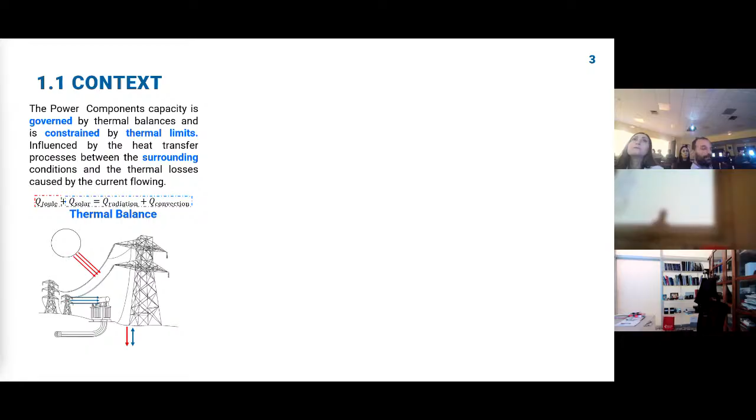Thermal limits. The thermal balance is being influenced by two main factors. The first factor is the heat that is coming from the current flowing inside the component. And the second factor describes how the surrounding medium has the ability to decrease that heat.

In particular, the maximum capacity, the maximum current that could flow inside the component, is proportional to the delta between the temperature of the ambient and the maximum temperature of the component. So if the ambient temperature starts to increase, the capacity will decrease.

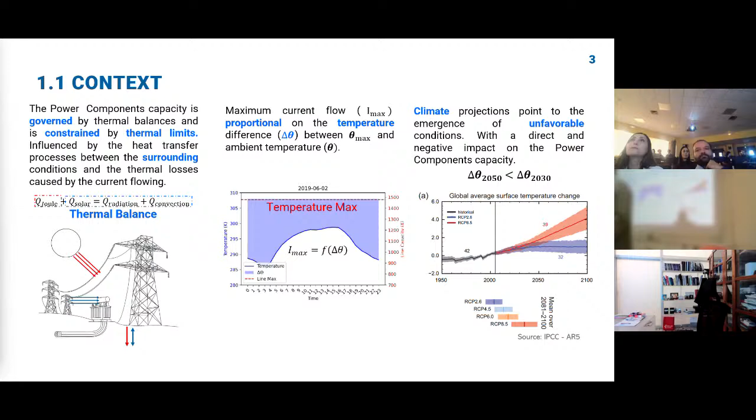However, climate projections point out that the temperature of the ambient will probably increase in the next decade, meaning that this delta for 2050 will be smaller than for 2030. But we don't know how much it's going to be. So that raises my first question: how can we project reliable thermal limits for the next decades?

Before we start to explain the method, let me explain three fundamental concepts in this investigation. The first is the ampacity. The ampacity is the real maximum current that a component can carry out safely. It could be calculated or monitored, and here you will see it in blue.

The second is the rating. The main difference between rating and ampacity is that the rating is a value selected by the operator. So if I have a really conservative rating, we could be under efficiency. However, if I select a more dynamic rating, I could be in a risky zone.

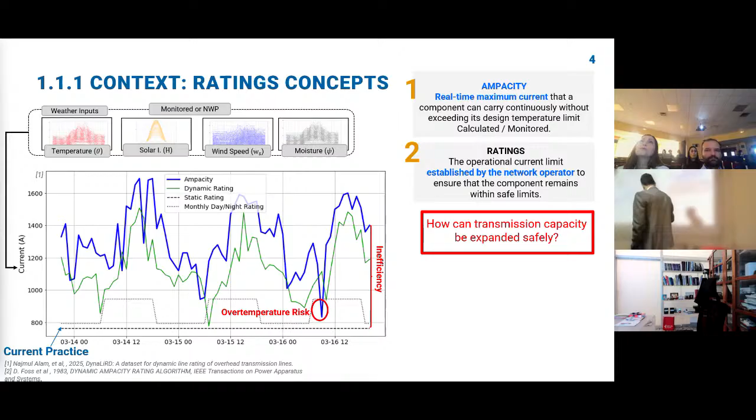So how can the transmission capacity be expanded safely? In order to address this, over 3 decades ago, the concept of dynamic ratings emerged. This concept is mainly related to weather-dependent capacity, using a component at a higher maximum capacity allowed by the operator.

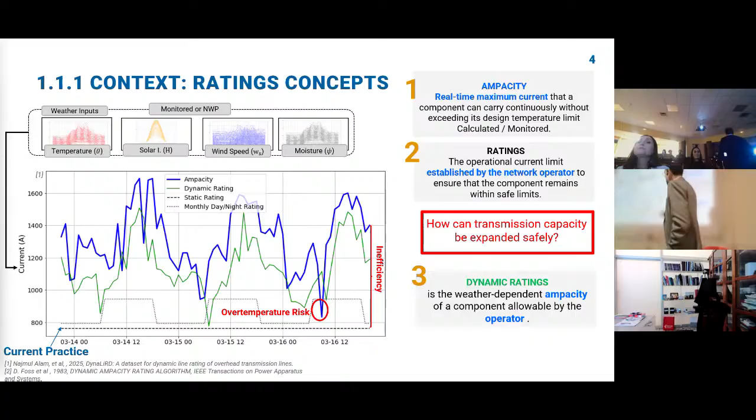So the second one. However, this concept is mainly related to short term. So that raises a challenge: how to develop thermal ratings in advance without compromising safety?

So now we've established the fundamental concepts. Now let me show you the full landscape of the context. This diagram is mainly divided into the three main components that this research investigates, the main subjects of the research. Let me explain a little bit.

Here in the first column, we see that thermal models are really well established and standardized. Second, we see that most of the work has been done for overhead lines. And third, that this work has been done for short-term operational planning. So let me show clear methodological gaps.

First, there are no studies that integrate dynamic thermal rating with long-term planning. Second, there is no standardized method to include dynamic weather ratings with risk-aware planning. And third, and most importantly, climate change is not directly included inside the rating.

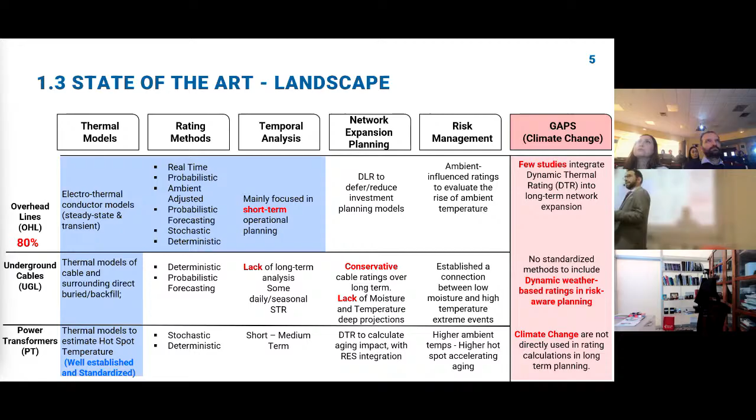So now that you can see the full landscape of my research, let me show you the key studies. It's important to highlight studies that analyze the interconnection between climate change and capacity. The first one is Bartos, who analyzed overhead lines in the United States using representative concentration pathways. He found that the mean capacity in the United States would be reduced by 6% by 2050.

The second study is in the UK. Cradden analyzed overhead lines using 100 weather generator scenarios for 2050. She found that, for example, for the summer months in 2050, capacity will decrease.

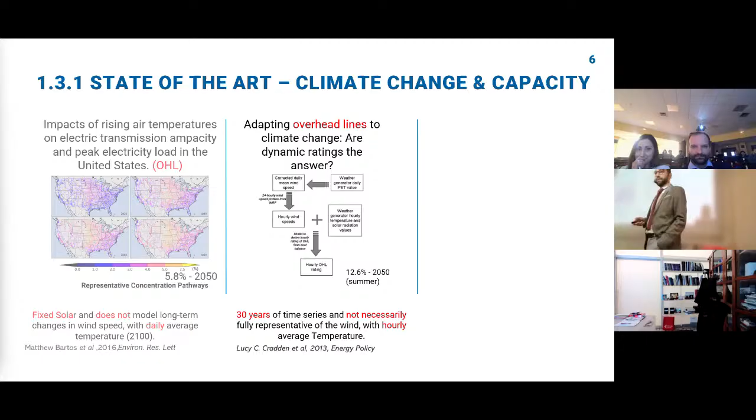However, as you can see, all of these studies have focused on overhead lines, and probably other components are not fully represented. So the question is: can we fully represent future climate in order to analyze the capacity and power system of all the components?

The second study is related to DTR with probabilistics. The first study here is on overhead lines, made by Douglass. The important part of this study is that he introduced a new concept of DTR, called quasi-dynamic rating. To do that, he introduced cumulative distribution functions inside the ratings in order to let the operator introduce risk.

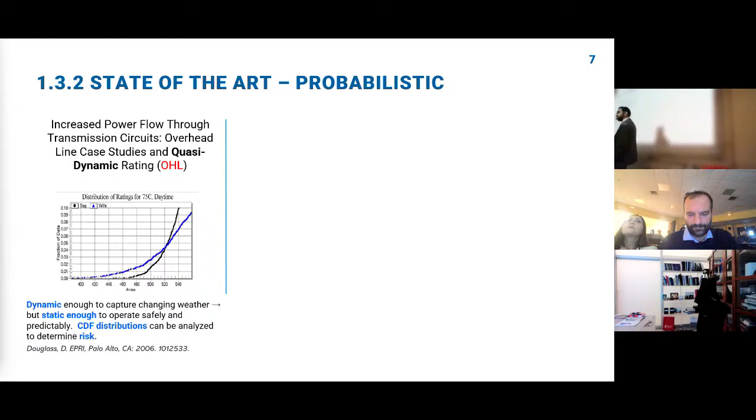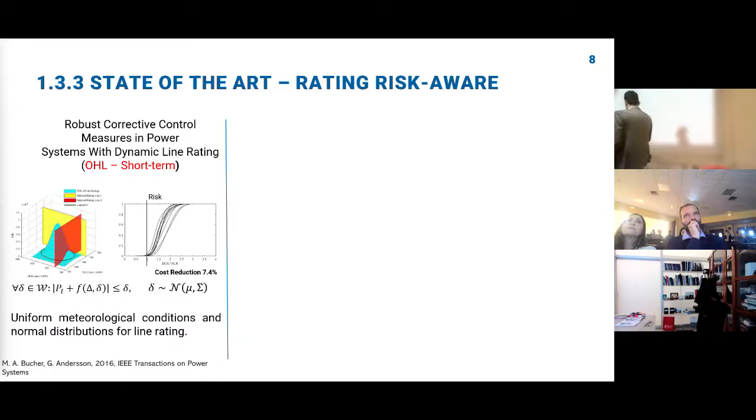Now, beyond analyzing capacity, we need to see how the rating is increased with the risk. The first is Bucher, who introduced a robust control inside the rating using a probabilistic constraint. He found that doing this, the cost could be reduced 7.4%.

However, all of these investigations have been focused on overhead lines and in the short term. So these insights shape my contribution.

This shapes my contribution objective. The main objective of my thesis is to develop a methodology for long-term power system planning that incorporates the interrelationship of three main concepts: thermal ratings, network planning, and climate change. It will be addressed by six questions.

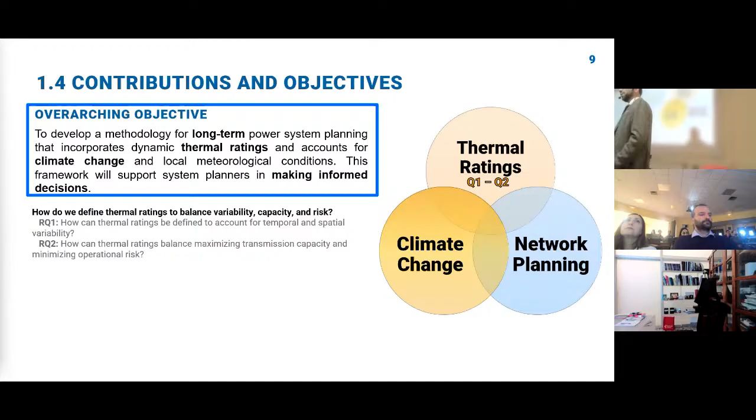The first question is how to calculate the thermal rating in advance, including variability and capacity. The next two questions are related to how to introduce these ratings inside the network planning. And the third is how climate change will impact this using the previous questions.

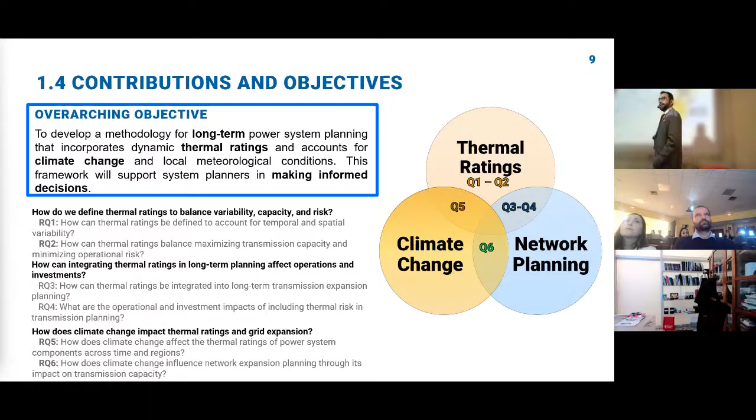So until here, we have established the context and the main question of my research. The following slides will focus on answering only one question: how we could calculate in advance the rating for the next decade.

It's important to highlight that in order to calculate the ratings, first we need to calculate the capacity. And in order to calculate the capacity, we need to use thermal models. Here is the most used and most studied one.

It's the thermal model for overhead lines, mainly governed by the thermal balance and influenced by the temperature of the ambient, solar radiation, and wind speed. However, as we know, overhead lines could extend for many kilometers, so this methodology analyzes the spatial variability of each segment inside the line in order to find the worst condition.

The next thermal model I'm showing you here is for underground cables. The main difference between underground cables and overhead lines is that now the heat exchange occurs with the soil. Second, this component is mainly installed over 80 centimeters and even up to 5 meters deep. Third, the thermal balance formulation is mainly influenced by soil temperature and soil moisture.

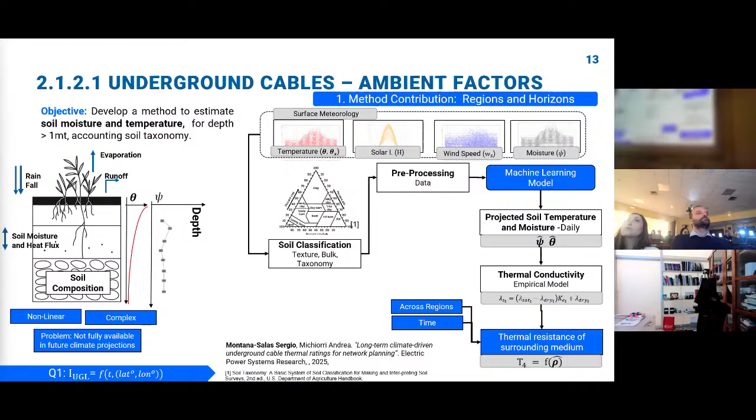Now we have our last thermal model: the power transformer. This thermal model is really influenced by solar radiation and ambient temperature, and the key factor here is the wind factor. So here we use a well-known standard to calculate capacity, but it's mainly modified in order to introduce the influence of solar radiation.

It's a five-step process. First, for the specific location of the component, I gather the climatological variables. Second, by the use of the specific thermal model over time, I'm going to calculate the capacity. So here, in this specific figure, you see the calculation of the capacity over 50 years. After we have all the simulation, we have the possibility to divide it into specific temporal subsets. For example, monthly hour, month, or year.

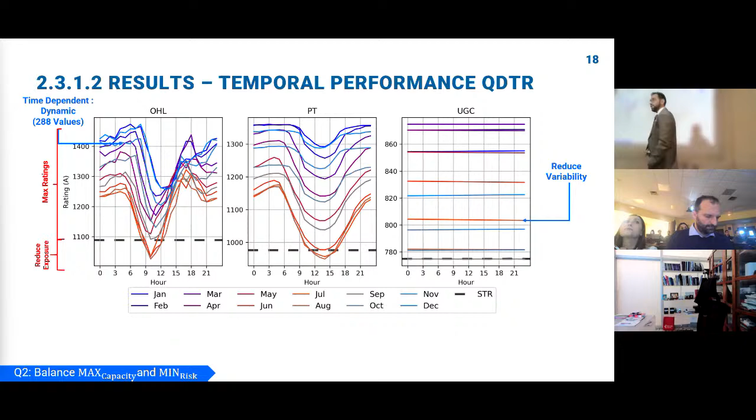The next is the temporal performance of the QDTR. So let me explain this slide. We could see 3 things. First, it is time dependent, meaning we have the possibility to select monthly hour, as I showed you before. The second is the seasonality: colder months, maximization of the rating; other months, reduced exposure to climate change. And the third thing that we show here is the difference between models. Underground cables, as you see here, have reduced variability, mainly due to the influence of the soil inertia.

The third result is a spatial performance of the QDTR. Sorry, I was moving. So to do that, we ran the same previous methodology, but this time across Europe, with the 0.25 resolution and over the last 50 years. With that, we could see some interesting things.

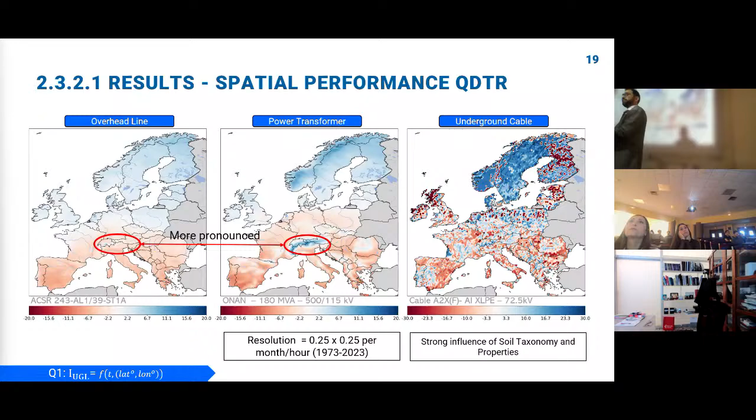So until here, we have the summary of the first chapter. So what was my motivation? I need to calculate the rating in advance. How did I do it? Two contributions. First, in order to gather the information for underground cables, a new model to estimate projections of soil moisture and soil temperature, in order to calculate the thermal resistance.

And the second and most important one is the quasi-dynamic thermal rating. This is not only a methodology, this is a rating description that should be integrated inside the dynamic thermal rating. With this, we could maximize the capacity, for example, 22% in power transformers in a regional way. And second, meanwhile, controlling the risk, because all the previous results that you saw are with a 1 per 1,000 lower threshold risk.

So until now, I established the methodology to calculate the rating number. In the next slides, I will focus on how to integrate this thermal rating inside the network plan. So here is a typical network expansion plan formulation as an optimization problem. This optimization aims to minimize the system cost. However, it's mainly focused on controlling the capex of lines and power transformers, and not generators. We did it because I want to isolate the influence of the QDTR.

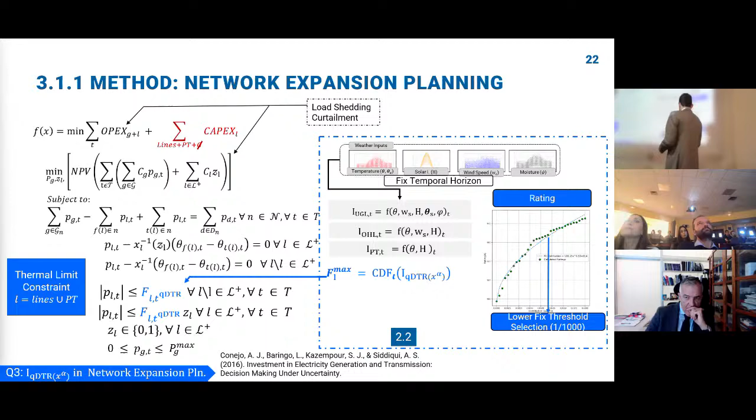So a little bit of how it works for each network component, for example, underground cables and overhead lines. I'm going to calculate the QDTR, that's a cumulative distribution, and fix a specific lower threshold. As I said, normally all my studies use 1 per 1,000. And with that, we replace the maximal limit constraint inside the thermal limit constraint of the optimization.

So let's see the results. First is the impact of the QDTR using a specific network expansion plan, now with the library PyPSA. We managed to simulate the QDTR over all the regions that you can see here. The way PyPSA works only lets us use QDTR across interconnections, so a reduced quantity of lines. Even with QDTR only on interconnections, we see that the system cost is reduced using QDTR with a finer resolution.

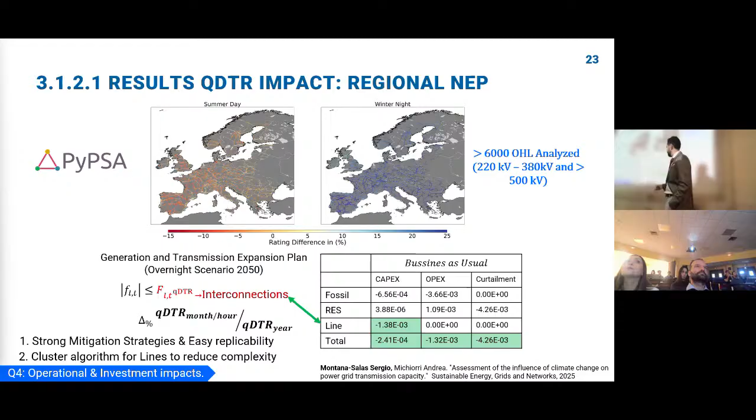The second: in order to overcome the limitation of PyPSA, I decided to move to a specific network test case. As you can see, the 24 nodes are now projected in the south of France, including the QDTR for lines, underground cables and overhead lines, and we analyzed two typical cases.

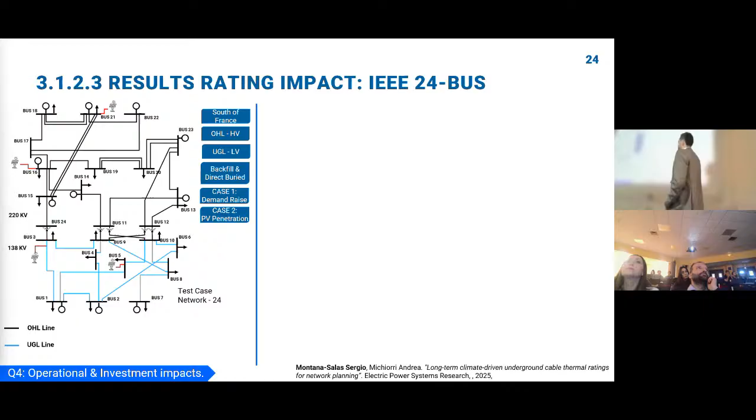So this result is very important. First, because of capex reduction: with the use of QDTR with a finer resolution, we don't need to build more lines. However, the second result, now with PV penetration, is that the QDTR highlights the dangerous zones where we have the probability of high flow caused by the PV and reduced rating caused by seasonality. And in the end, that means we need to build new lines for these two consequences.

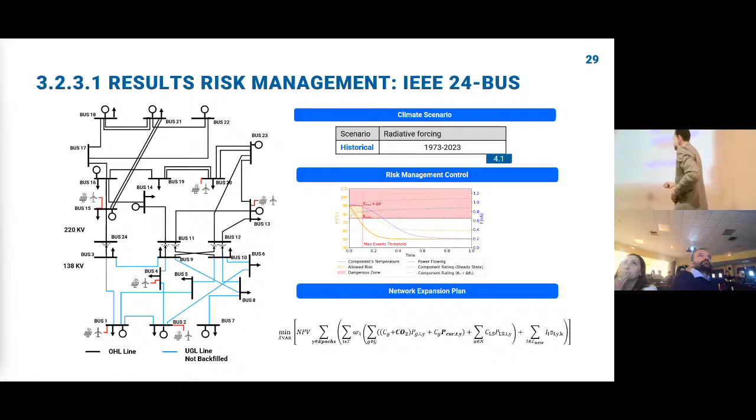So for this, we use our test case, a similar test case, but this time with our risk management control, and the optimization will be expanded a little bit to include a multi-period optimization. So we have the results, but before, I need to explain this chart a little bit. Left columns are QDTR calculated yearly. Right column, QDTR calculated monthly hour. Yellow results mean the results of the use of a static thermal rating, the conservative one that says we need to use 40 degrees, for example, as the temperature.

And the second is the power flow result for the QDTR yearly using the methodology that I showed you before. So three behaviors to show here. First behavior, in the specific lines, by the use of the QDTR yearly, we show the same contribution that I showed you before, a complete reduction of the investment. It's not necessary to invest in a new line in this specific line. And the second behavior is more complex.

It's showing that using the static thermal rating in another line, because it's the 18 and 22, we need a new investment. But here, the rating starts with a specific calculation, but before the investment, it's going to be constrained enough to be held until 2040, and in 2040 we need a new investment. So here, we delay the investment using the QDTR with risk control.

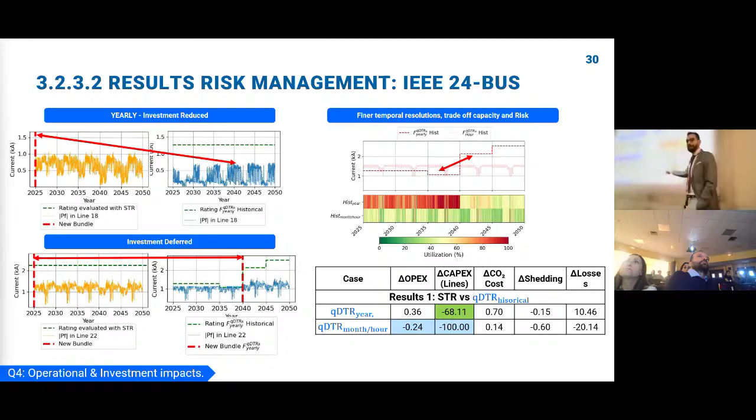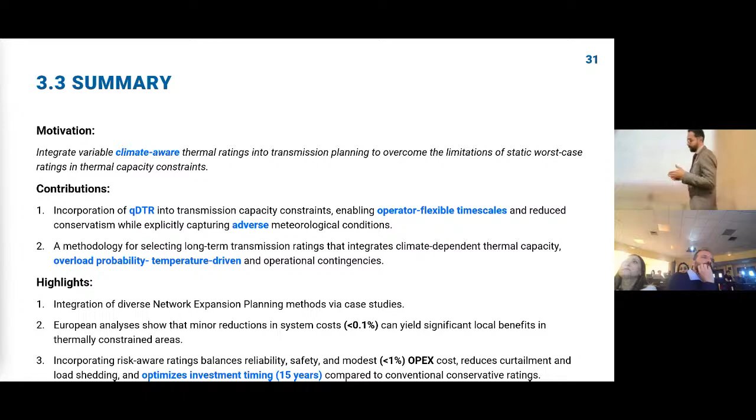So as a summary, question, how to integrate the QDTR inside the network planning? To answer, the first method is going to be introducing the QDTR to replace the rating directly inside the network expansion plan. And the second, a temperature-based, more constrained method in order to calculate the rating. To highlight, we use this case in different network expansion planning, and we found similar results, showing the performance of the QDTR. And the last, if we use the risk control, we could delay investment and also reduce it if we change only the resolution inside the QDTR.

So until now, we have established how the thermal rating methodology is going to be, and how to introduce it. And now we need to answer a question: how to include climate change and what the impacts are going to be. So it's important to highlight that all the calculations and every result that I showed before is with historical values. However, if I want to analyze a network today or plan a network today, it must work in the next decades. And we know that in the next decade, the temperature is going to rise. So how did we find a solution to that?

So my new framework here introduces all the methods that you saw before, risk control, QDTR. However, we change the data. Now the data is future data about climatic conditions. For this, we are using specific data, the climate and energy indicator for climate projections, as a proxy or best information available for long-term climate conditions. So let me explain a little bit more about this data.

So this data is made according to the representative concentration pathway, corresponding to the radiative forcing that is related with the CO2 emission and the greenhouse gas emission too. Also, it is important to highlight that this data set has a link with electrification. So let me explain more about this. We are going to take as example the business as usual or the worst case representative concentration pathway, that is 8.5. In the 8.5, we are going to have high temperatures. If we have high temperatures, the power system components are going to be more stressed.

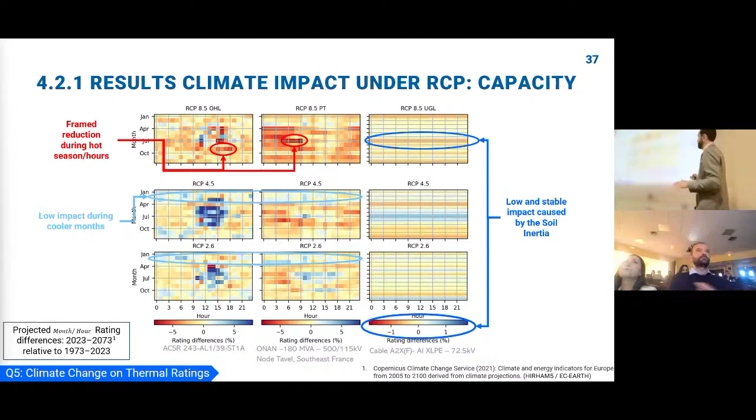So the following results, we use the same methodology that you saw before, but now we do it in a continental case. We use the RCPs in order to calculate how the QDTR is going to be in 3 main components. So the same structure. What we saw before was a specific power system. This is a regional pattern. As a regional pattern, we see that the least impacted still is the underground cable, confirming the hypothesis. Second, that the power transformers are the most stressed by the climate, even up to 5.5.

However, as I say, we can see that some regions, for example, the south of France and the south of Spain, will be more impacted than other regions. And mainly because, as I said before, it is influenced mainly by the ambient temperature. And the third thing that we see here is that in all cases we saw a reduction. So that means the climate will reduce, at different scales, the capacity of the network.

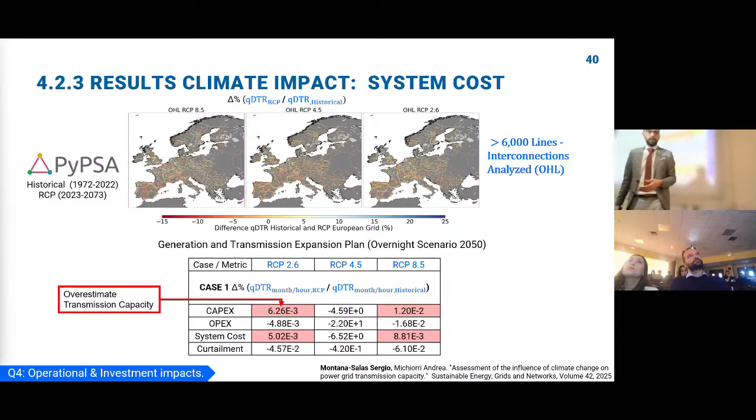And now we analyze what the climate impact is going to be on system cost. So we use the previous network expansion plan, we use PyPSA in order to analyze projections. As you can see here, the result is the difference between historical and representative concentration pathway for future scenarios. We see that if we calculate the expansion plan with historical, we are too optimistic, meaning that we overestimate the transmission capacity, meaning that now we need to spend more money, more investment in the future using the representative concentration pathway.

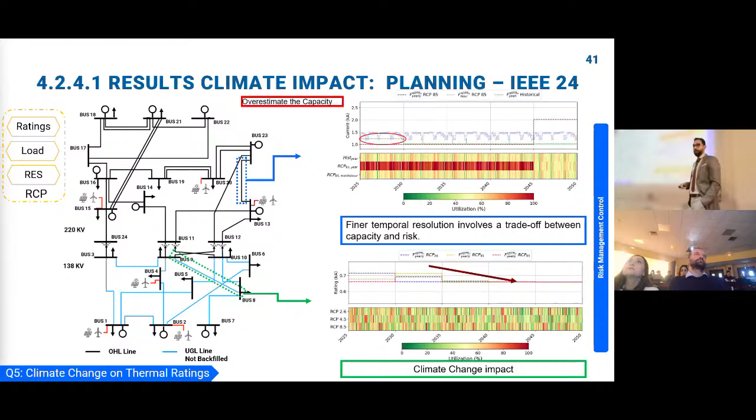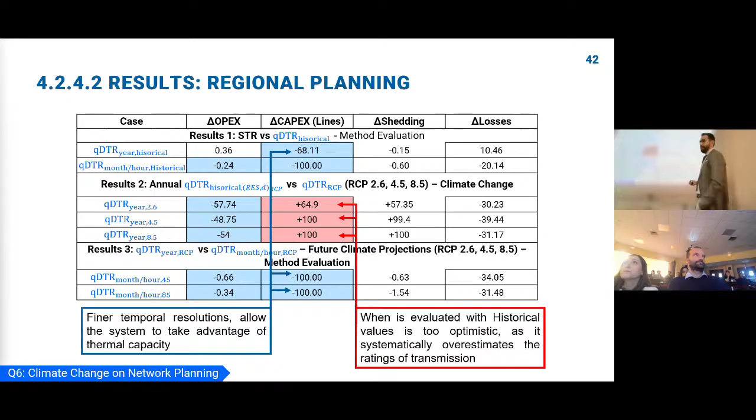The second part here is if we plan with historicals, we are too optimistic. Meaning that we overestimate the capacity, meaning that in historical we don't need investment. However, as we could see here with the RCP scenario, we need it. So here is the full landscape of the previous result and the historical one. In this full landscape, we see 2 things. Finer temporal resolution using qDTR allows me to reduce the investment. And second, when we evaluate our network using historicals, we continue being too optimistic, and we overestimate the rating capacity. For that reason, we see that the investment starts to increase using the specific scenarios.

As a summary, my motivation here was to involve climate change inside the 2 previous methodological results. The contribution is the integration of climate projections inside the qDTR and in the other methodology that is more constrained, temperature based. To highlight, capacity will reduce over the 3 scenarios due to temperature, even if we use the risk control. And the third one, that's also really important: if we use historical, we get a too optimistic result. For that reason, we must include the future projected conditions in order to plan.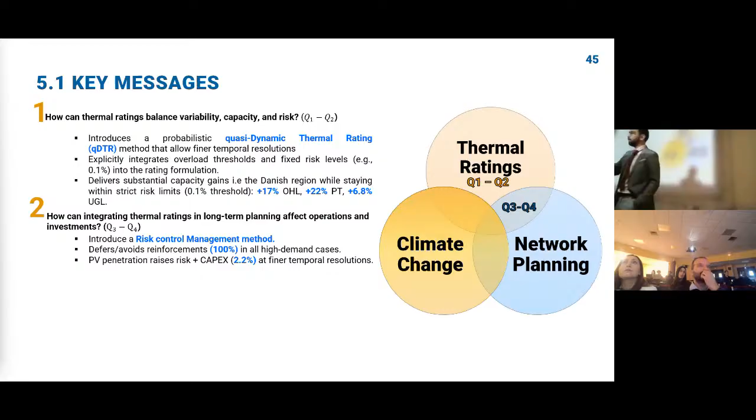The third one is climate change. As we could see before, the climate will impact all three components. If we analyze at a European continental scale, the power transformer will be the most influenced one, with a reduction of 2.1. And the third one is really important: we don't have to plan with historical. We need to include climate change inside our optimization in order to plan our future networks.

Perspective, of course, there are so many perspectives. First of all, it's important to update to new climate data sets that let us identify more regions, now with, for example, socio-economical patterns. Second, in the same way as we did with underground cables, in order to improve the variability of the soil temperature and soil moisture, we could do it with wind, for example, in order to improve the data set.

Second thing is, as you could see, all my results have been done with one specific climatic scenario. In order to be more precise with the uncertainty, we could include a multi-model ensemble, so different kinds of climate models, in order to assess the capacity.

Third one, incorporate the sensitivity analysis across available climate models to support better rating selection. The introduction of AC-OPF now, because we started to tackle distribution, so it's important to calculate the losses inside the optimization.

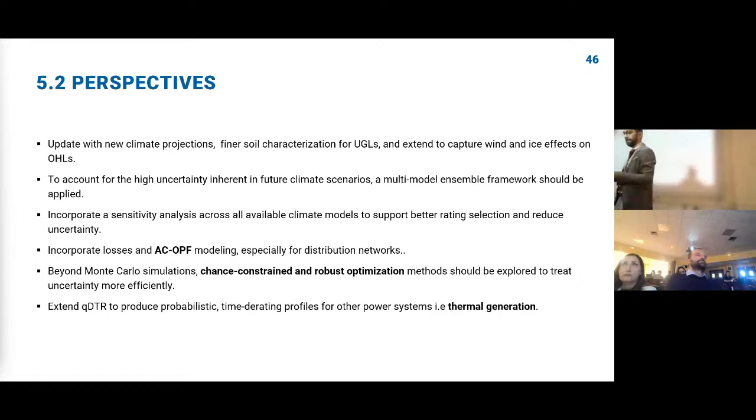Dissemination: 3 journals have been published, and 3 more are coming in the next months. One is 99% complete. The other is 80%, where you see all the results about the last methodology. And the last one is 10%, about the chance constraints inside the optimization. And 2 international conferences also.

So this is all my results, and thank you, and sorry about the sound and everything about the sound.

Do you know if it's necessary to move to that part? Let's verify — I think it's more important that first you do the exchange with the member of the jury remotely, because Fabrizio is going to ask the first questions. Can you hear us, Fabrizio? Yes, sorry, the microphone was switched off. Yes, I can hear you very well.

That's it. Shall we start? Yeah. So, Sergio, congratulations for your excellent presentation. Very good job you've done. Everything was clear in your presentation. And I would like to congratulate you on the topic, the presentation, and the results. So this, I think, is important.

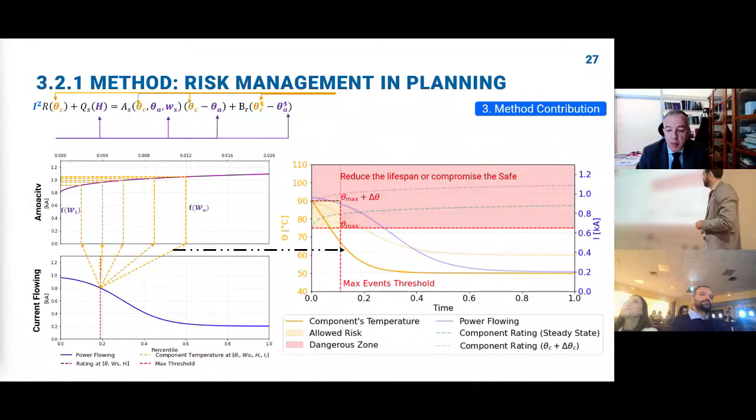I read your thesis, and now I've listened to your presentation, and I have just a couple of questions to start the discussion. The first question is about distribution, because you mentioned that you studied distribution systems, and you showed us the impact of PV in distribution grids. Then in the thesis you presented a long-term network expansion planning that is probably designed for transmission systems, not for distribution systems. So any idea on how to move from 24 buses to thousands of buses, because this is the main difference. And there are many other differences in terms of power flow, radial networks instead of meshed, and so on. But the most impacting difference is the size. So is it possible to scale up your methodology for distribution applications?

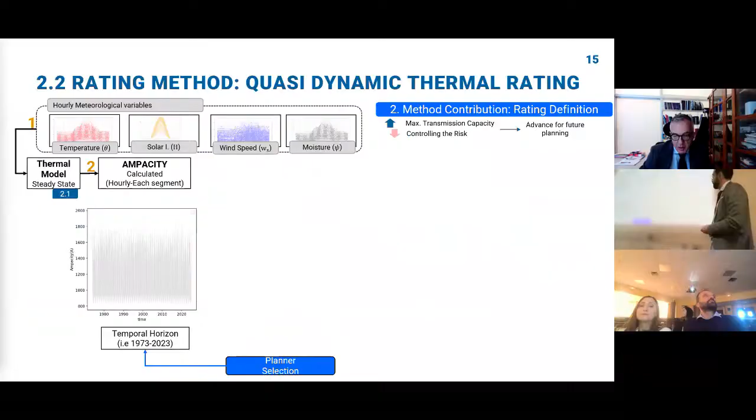So this probably makes the problem non-convex. And so the question is, do you think we can really use analytical methods for long-term planning with the AC OPF, because you need a lot of transformations, band transformation, linearizations, and in any case you need many heuristics. So probably we have to do something different. I don't know, but this is a research question - just to understand if you have started thinking about it.

And I have also another question related to the Monte Carlo. When I was reading your thesis, I thought, why not use sequential Monte Carlo? Because there are a lot of temporal correlations, particularly I was thinking about heat waves and the impact of heat waves on capacity and ratings. So you decided for the classical Monte Carlo - I'm sure you have reasons, but I just want to know why you made that decision.

So first question about the ACOPF. The answer is yes, some researchers had done this before. However, the limitation is that this research is mainly focused on maximization of the line, meaning how much the DTR could increase the line. Let me show you here, for example, in the right part, they're analyzing with an advanced constraint a specific maximization of the control of the line.

The tricky part I'm still trying to solve with the professor in Spain is how to include the control of the temperature at the same time. This is the second and third study I show here. If we want to include that, we also need to include the thermal balance, so it becomes more non-linear and more non-convex.

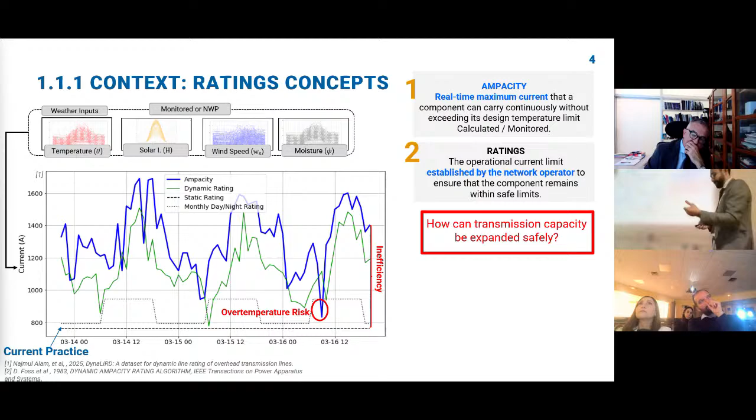However, using Monte Carlo non-sequential also introduced me to a new subject about generator scheduling, a different kind of methodology that will improve the accuracy of my model. The other thing I have with Monte Carlo non-sequential, about the cumulative distribution of the temperature, for example, is the effect of the PV and wind over the line.

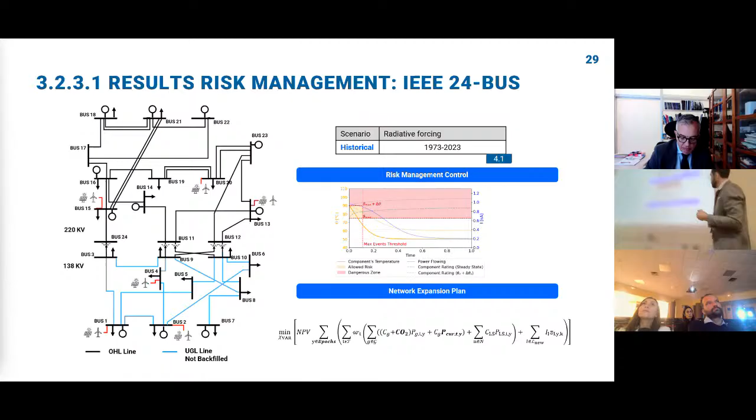Let me show you this. If I have to introduce the connection not only in production but also how the temperature of the ambient and solar radiation will also affect the PV and wind, then of course if I do this, it's not possible because now each scenario will be correlated. So I cannot make a simplification about the probabilities.

So the issue with Monte Carlo non-sequential is first how to introduce the thermal inertia of each component every hour. My solution is doing it daily instead of weekly, so I lose the scheduling of the week but still work in daily steps. The second part is trying to solve how to deal with the interrelation between PV, wind, and cables with the weather, because all of these are interconnected through the weather.

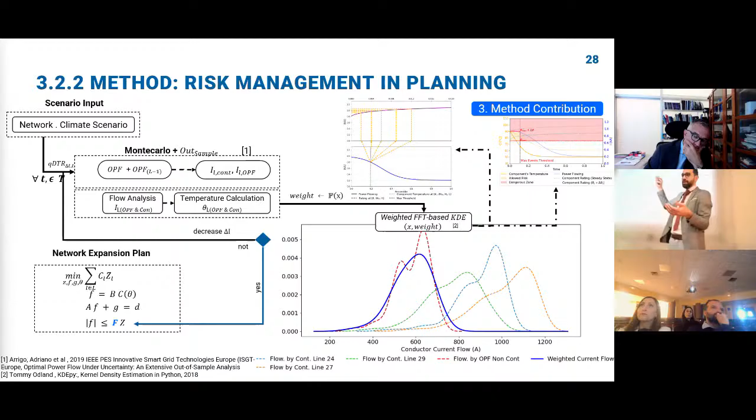I'll give you an example. If we have high temperature, for sure the efficiency of the PV will be reduced, but also the efficiency of the cable will reduce. But also, if I have high solar radiation, the PV will increase better, but the cable will reduce. So I don't yet know how to deal with this non-sequentiality, the sequentiality of that, inside the optimization.

But it's possible to be done. It's important to realize that just to arrive at this chart took us about a year, so moving forward will need more years for sure.

Yeah, that's just to conclude.

Thank you, Sergio, for your presentation. I have many things I would like to discuss with you on this thesis, but I think it's time to give room to other reviewers. So thank you very much from my side.

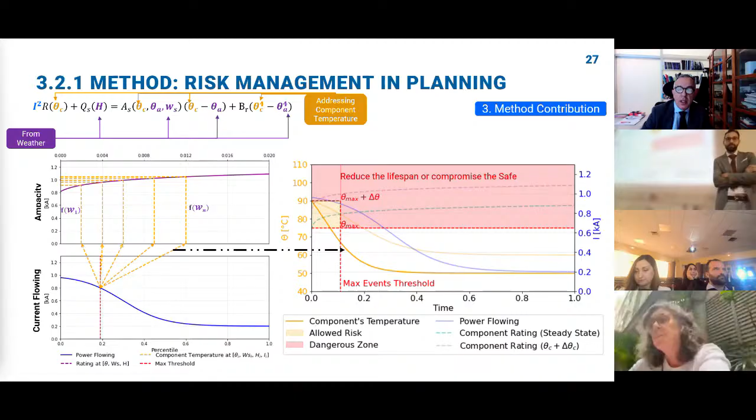As a planner engineer, I really appreciate your effort to bring risk into planning. Planners don't always want to use probabilistic methodologies, even if they have them. I'm pushing them to use probabilistic approaches for planning, because this is what we need in distribution at least. With your methodology, we can add risk and include the rating in a different way without changing too much. This is a very engineering-sound approach. Thank you very much, Sergio, for your job. Thank you, Professor Pill. Thank you, Professor Pill.

So I think now we can go to the discovery. Can you hear that?

Hi. Are you hearing me? Yes, Professor Sita. Okay, thank you, because I believe I have a frozen image, so I was afraid not to be here.

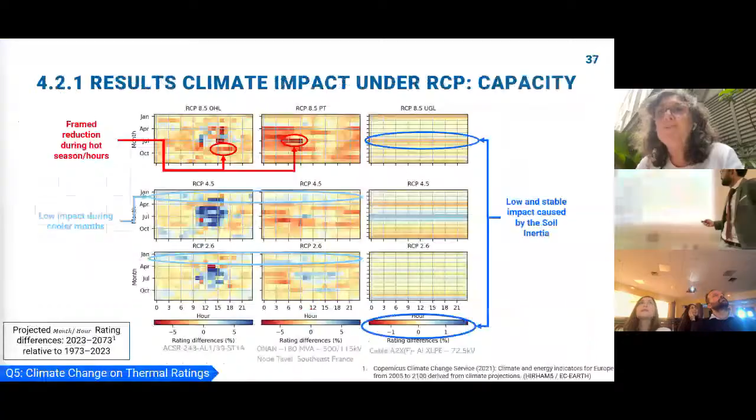Yes, this one. So first of all, also to congratulate you, because in fact you were able to put a good effort on the publication part to disseminate in scientific terms the results of your research, the models that you are proposing. So I believe you have 3 published papers in journals, right? The 3 first ones you have there, 2 of them as first author.

And then in the thesis you said you had 2 more, but now I see that you have 3, right? And you have also 2 conference papers already published. Can you explain to us a little bit more about those papers that are not yet published, that you are preparing? The first 2 ones, in fact, are almost there. They should not be so far from submission. Can you explain to us what are the results that you are about to include in those papers?

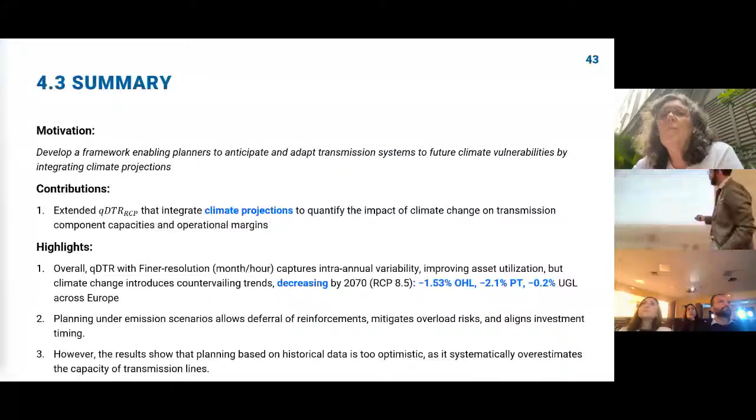Yes, Professor. And thanks. Okay, the first one, that is optimizing distribution planning with long-term ratings in energy transition, is the results that you see here on the distribution side. Sorry, I'm coming back. Here, those results. So to explain better the methodology used here, the first one uses Monte Carlo in order to analyze the technical violations in low voltage. So here, mostly we analyze the ratings of the power transformer that is connected with the medium voltage and the overhead lines that are also more congested.

So this is Monte Carlo mostly to see what happens if we introduce more PV and charging stations. How will the network be constrained? And the second on the distribution part here is more a probabilistic network expansion plan that is well established. I've been working with this probabilistic long-term network expansion planning. But the main idea here was the introduction of the QDTR to see what happens if I introduce a new rating methodology. So the result is that with this kind of rating methodology in this medium voltage network expansion plan, we could reduce the investment.

And also we see the trade-off of the QDTR, that they are not only expanding the capacity, but also analyzing these sensitive areas with PV production plus the hotter season. The following, that is at 80%, is this methodology. It is mainly the method that I show you here, the temperature-based constraint, and the results that you saw in the thesis are the results of this paper.

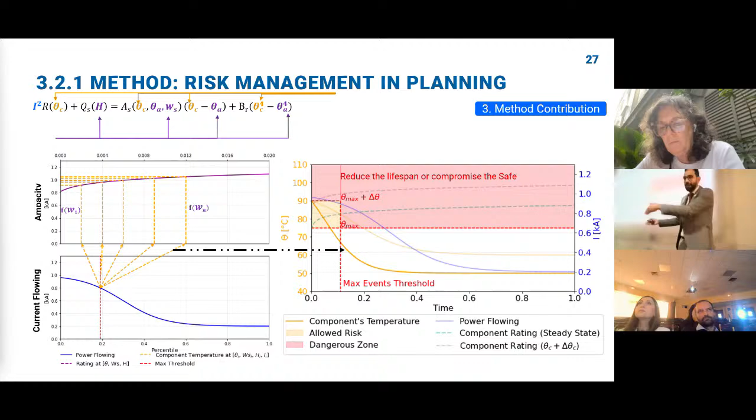It's at 80% because we are still trying to improve the message, because as I said before, that took us 1 year in order to understand this. So it's going to take more time in order to try to explain. And the third one is a publication that I just started a few months ago, 2 months ago, with the 2 engineers from Spain.

The idea is trying to introduce the chance constraint, but not the typical chance constraint that is shown in one of the papers, to constrain or analyze the maximization of the capacity, but also introduce a joint chance constraint that lets me analyze what happens if I also consider the temperature inside the nodal balance, for example. But still, we are arguing how to do it and how to do it really well. So for that reason, it's at 10%. It will be released maybe in, I don't know, some months.

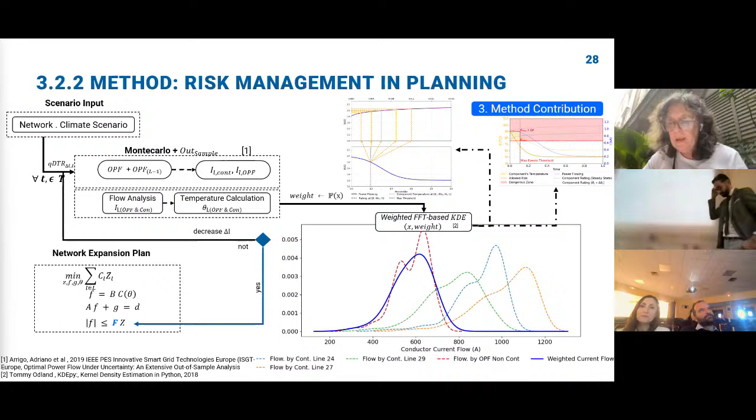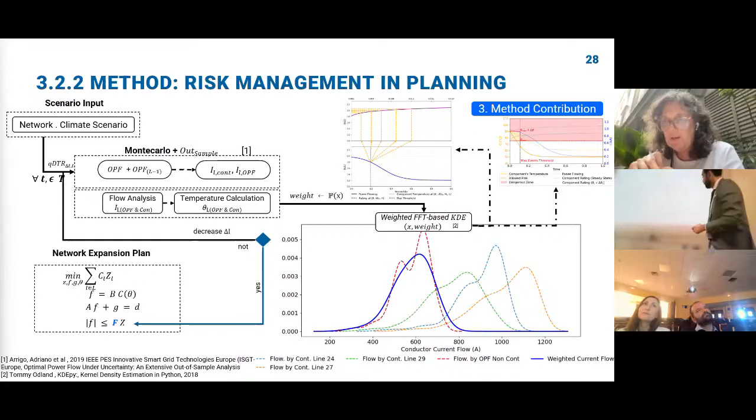Very good. Thank you for all that detail. And maybe now we can discuss a little bit about that future, because you have this planning methodology, so we are looking into the future, right? Yes. And in your thesis, you address it in many ways. Of course,

you present, for instance, the need to know about the demand in the future, which is always difficult. Not just because we are somehow trying to have accurate results for something we don't know really much about, but also because we are now going through a very different context than we were, let us say, 5 years ago. Why? Because we have this climate change, we know about it. We don't really know about its evolution. We know it is there, but it is still very difficult to realize what the evolution will be.

But also, for instance, demand in power and energy, namely for electrical energy, is changing a lot. It would not be so difficult to forecast demand for the future, I would say, 10 years ago. Right now, it may be quite difficult because we have these changes in the climate, and the change in the climate, of course, has an impact on the demand for electrical energy. But also we are seeing a huge increase of demand for electrical energy due to data centers and due to the intensive use of very complex artificial intelligence models, right?

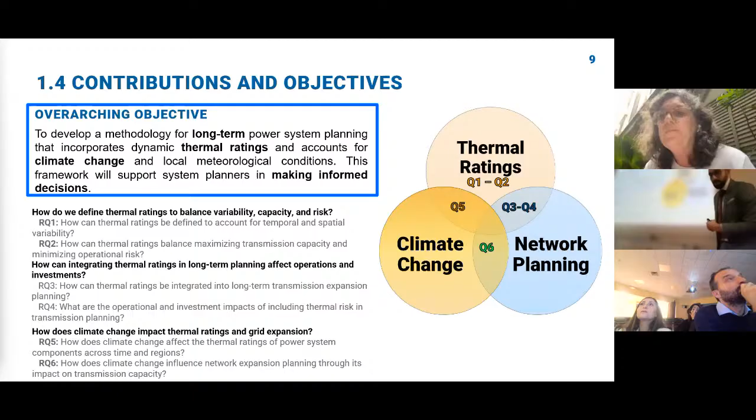I was asking about research questions. Today, looking at the results you have, at the current state of the art, and at the future and what you find very important to do from now on, if you had to choose only one research question now, what would that research question be about? From my previous one or a new one? A new one for the future.

Okay. For the future, I will stay in this landscape, because this is the landscape of the research. I will maintain my research question on how to improve calculating the rating in advance for a few decades, how to gather the rating using future scenarios. Why? Because for me this is still the missing question inside the industry: how do I deal with my ratings without using historical data. This is something that I try to approach, of course, with the QDTR.

For example, this ambient adjusted rating is an approach from the United States that has been improved over 15 years, and they are still improving it. This is the way they plan the future. I will do the same. I maintain my QDTR, trying to solve how to calculate in advance, but this time putting more uncertainty inside my model, trying to make it more stable, and helping the industry put it inside the optimization problem.

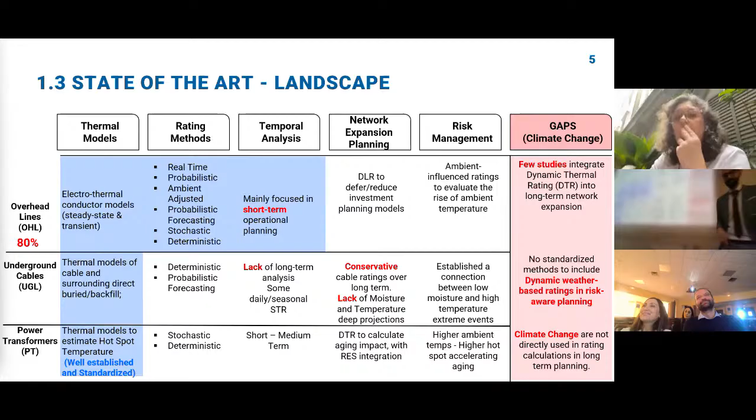Thank you very, very much for your presentation. I thought you did a great job. I thought you brought the pieces to life, which was really useful. And I also know that the publication record is pretty strong thus far, and it has potential for further development immediately arising from this piece. So that's really great. That's very important. Some of the questions I was going to ask are maybe taken, but I'm going to do my best.

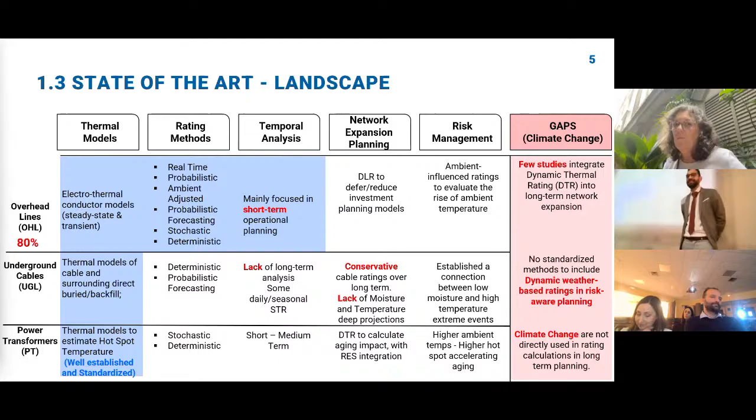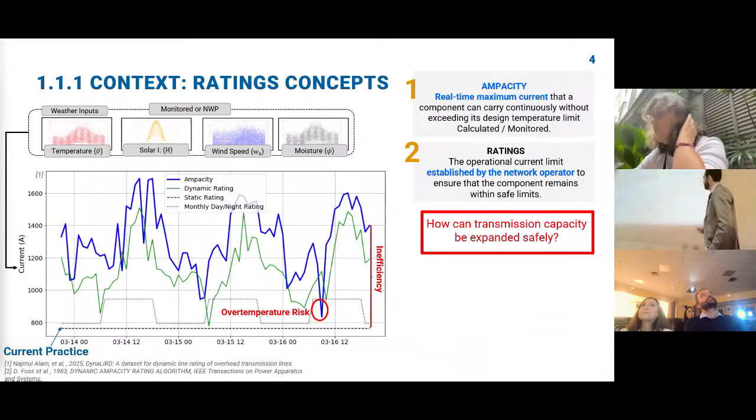My background primarily is distribution. Even though I know a little bit about transmission, you have a transmission line in figure 2.2, and I can see the color changing as you move across. Yes, that one. I suppose that's primarily related to ambient temperatures, as you move across the degrees. So in distribution networks, the temperature of the conductor is often very local due to geographical or topographical issues. Is that something you've considered at this stage, or is it something you might consider in the future? Thanks.

And I like this question because I know that you talk about overhead lines, but I would love to answer it in underground cables better, because distribution is mostly underground cables also. So first of all, we ended by the overhead line. So the spatiality, when I said that here I analyze the spatio-temporal of each segment, meaning that I'm not only taking the temperature, I'm taking it discretely. So I'm going to give you an example with transmission, and I'm moving forward with distribution, because I had to understand that when I did my research about distribution.

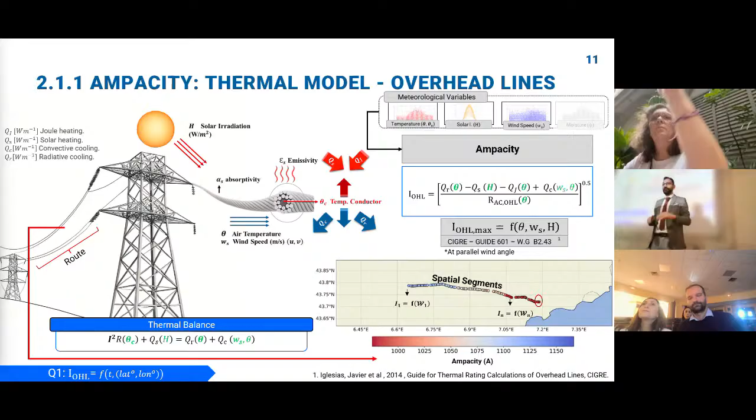A transmission line, when it crosses a valley, we have high wind. It will be really hot, but high wind is good. Instead, low wind and the same temperature is really bad. So the same line that is crossing one valley, one mountain, in the mountain could be like this, and in the valley could be like this. So this is the geographical part that I'm using in my investigation.

Now in distribution, when I started to analyze the distribution network, the first challenge I encountered was in the overhead lines. This is a bare conductor, and in distribution mostly you don't have bare conductors. You have conductors like this. So maybe it's XLPE or it's not XLPE, but it's covered. So when I started to analyze the thermal model, the thermal model that I use is an extension of this thermal model in underground cables, but now influenced by the solar radiation and the temperature. So it's a different model.

So mostly I would say that the tricky point here in distribution is to know if the line is backfilled or is not backfilled. This is the first question. And when I asked the distribution side, they said, don't know. So if you ask me, I will plan it with direct burial, because in that way the seasonal pattern will be influenced. When you put a backfill, it's in order to maintain the thermal stability inside the cables. So you are losing mostly all of those impacts. So when I started to plan, I said, okay, you don't know, I'm going to put my worst case that it's going to be direct burial. And in that way, I consider how my soil moisture risk is going to be.

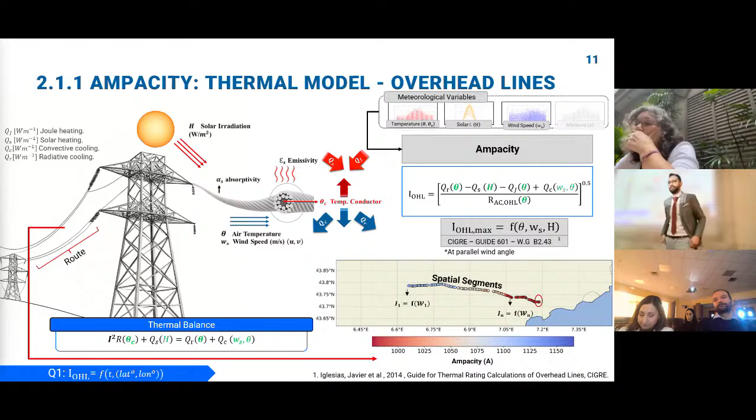So the next thing I'm going to ask about is a lot of your focus is on planning, which is great, planning in the context of climate change. One thing I'm very interested in is integrating flexibility and storage and things like that into the planning of systems. How would you feel these new concepts in planning would fit into your approach?

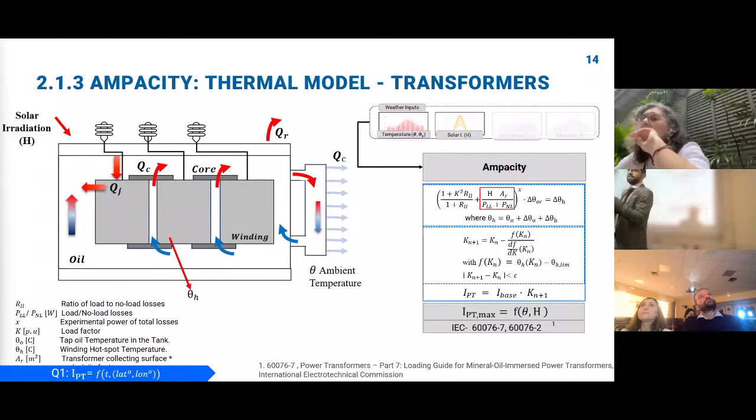But could we talk about a specific concept? Let's say, for example, maybe demand response for EVs or something like that.

Okay, demand response. So it depends how we're going to use the load. I'm going to give you the best answer from me for that. Previously I made an investigation in Colombia about demand response, and this is also about the people, and whether they like to use it or not. So it's difficult even to forecast.

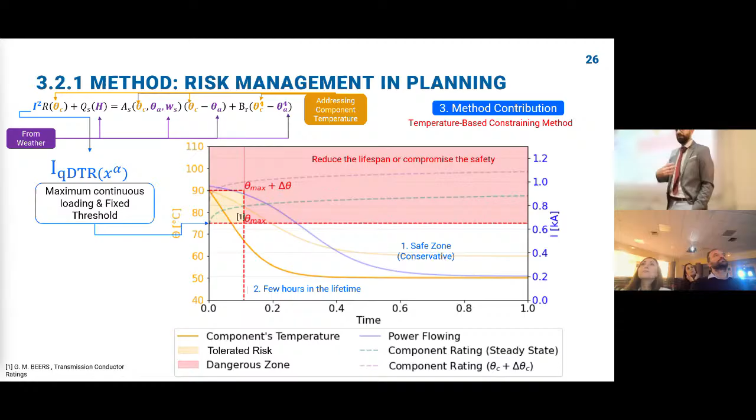It's not, it's not. It's something I should put inside my perspective, and you're right. The aging for me is an easy move forward, because aging depends on the temperature. So in my expansion plan doing Monte Carlo, I have thousands of realizations only to know this temperature, and the calculation of the aging is taking all this formula back.

So that meaning it's not a constraint, it's more a result until here. The aging is a result of the temperature, so I control the temperature, meaning I control the aging until here. But the right way to do it, remember the studies that introduce the thermal balance inside the constraints? Is to introduce this as a constraint inside the optimization and add another constraint about the aging. So temperature, aging, correlated but different constraints.

So it would be a little expansion of what you've done already. Yes, it's going to be an expansion, but it's more about how many hours you want this temperature to increase and how much is the quantity of the temperature. So aging is related to frequency and the delta. I don't have the answer yet, but this is something I need to move forward on.

So do you think in your framework, you've probably talked a little bit about it, that you can apply the framework to both transmission and distribution? What do you think are the key differences in the implementation between the transmission system expansion planning and the distribution system expansion planning?

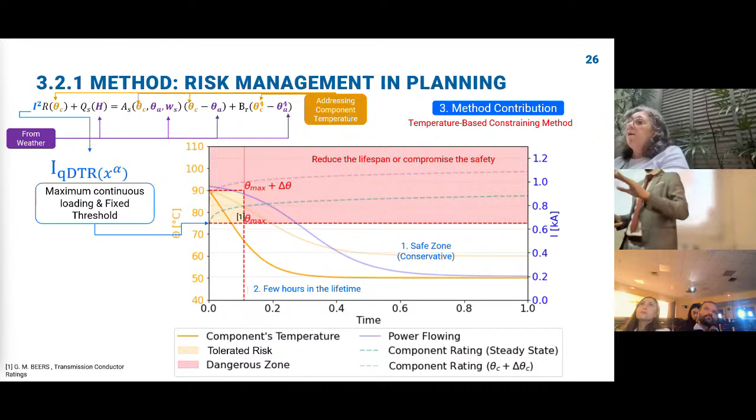And I've one final question. Sorry, Ron. No, it's okay, it's okay. Your work is very comprehensive and it's covered a lot, but because it's so comprehensive it actually makes you think about a lot of questions.

Yes. So one of the things that in my country we're particularly concerned about -- we're not really that concerned about temperature rise, we could actually do with some temperature rise, in fact. But what we're more concerned about is probably extremes. One potential scenario for climate change is not just an increase in general temperature, which has an impact on the rating of the device, but an increase in extremes. Is that something you're thinking about for future work?

No, indeed, it's already done. It's not a delta of increase, it's my rating here -- this I'm taking from the extremes, always I'm taking the extremes. And here, for example, the extremes are over 50 years, not the extreme of 1 year, it's the extreme of 50 years. So this, I don't know, 28 or 30 observations is the observation of the extremes over 50 years. And I do the same for the future. So I know that this delta is always moving forward, but I am only working on that.

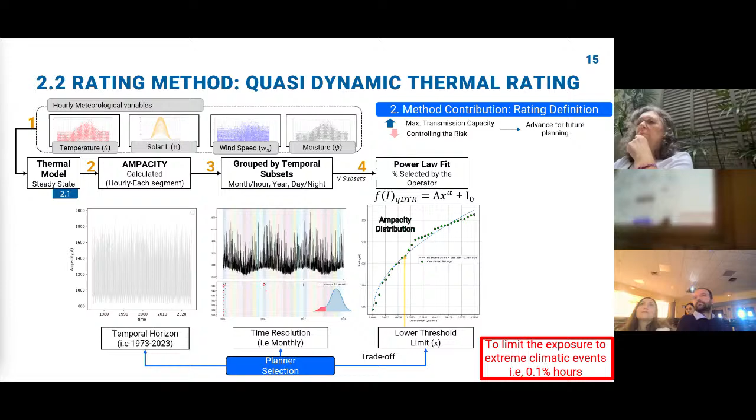But I suppose what I'd be talking about would be that, let's say, for example, the average temperature of a country might be increasing, right?

The peak temperature ever recorded in the UK until about 3 years ago was 37 degrees Celsius. Then about 3 years ago, we had 40 degrees Celsius, a significant increase over the long-term peak. So the potential direction of travel for weather is increased peakiness, and while there is an underlying change, the extremes will become more extreme.

So as a super quantile, like the lowest quantile? Yes, indeed, it wasn't my investigation, it was a previous one. Andrea has been working on super quantiles, but more for short-term patterns, trying to find these super quantiles to refine the ratings. As you say, I'm using long-term patterns, so I can only analyze the extreme hours from the previous 50 years into the next 50 years. But maybe something in super quantiles in the middle could work too, though I don't have a way to formulate it yet.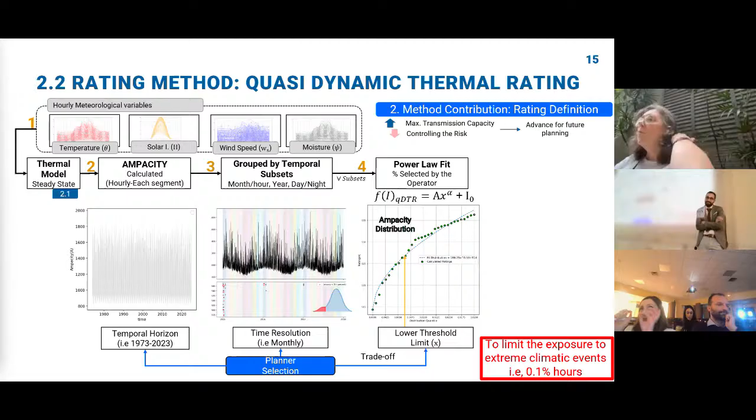More complex, yes. Due to my background, this makes me want to ask you about the complexity of the optimization problem you have to solve. You commented a little about that, but I'd like to know about the dimension, the scale, the horizon, and the computational time needed to solve it.

We're going to talk about the optimization, so I need to show you the optimization. Let me take 1 minute, because this is the last paper that we are doing with Andrea. So give me 1 minute.

I'm waiting for the PDF to open, because sometimes Acrobat is slow. No, indeed, here's my optimization, here we are Roman. The optimization one does every time is like the child of the optimization, so I will show it. I'll put it here in order to show it really fast.

This is a multi-period optimization, meaning I'm taking epochs to analyze 5 years, and each epoch has a decision model. Inside each epoch I analyze every hour, and inside each hour I run the Monte Carlos. If I have about 8,700 hours per year, I have to run a Monte Carlo for each one, and each Monte Carlo needs to be verified by the out-of-sample check. I started with 200 Monte Carlos, but if the out-of-sample shows the same risk scenario, I need to increase it, and the out-of-sample is 2,000 Monte Carlos, so 10 times more.

I'm telling you this because the computational time is harder, and the Monte Carlo isn't included here, it's only an external module that analyzes how the network will be and what the results will be. From the thermal point it's not stochastic, it's a deterministic multi-period transmission expansion plan, influenced by the good timing, by load shedding, and by CO2. If I need to include CO2, or see what happens with PV, and for the lines I use a linearization to try to linearize the losses.

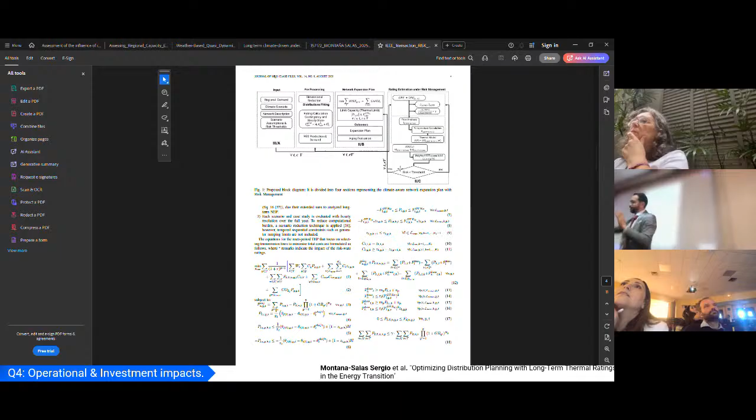So, the increase for demand and loading, and this is with a specific formulation, the rate. So I have rates for demands, I have rates for wind, PV, I have rates for everything, and everything will be evaluated by epochs of 5 years until 2050. So there are 10 epochs. That's the output.

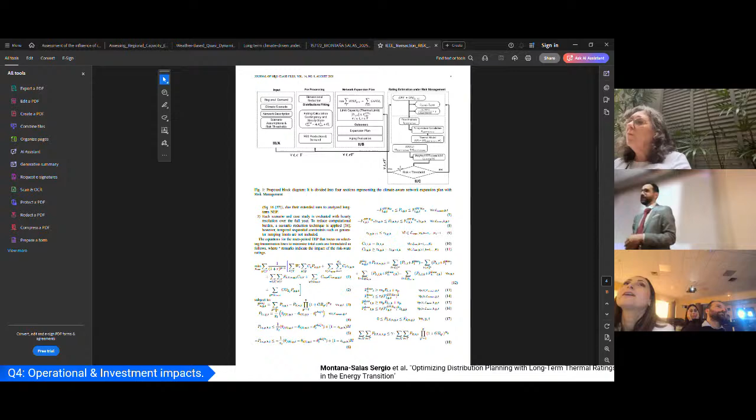A good question. And you solve it, it's non-convex, right? You said it's non-linear. A MILP. A MILP. And Gurobi, yes, I'm using gurobipy.

And why? I like to talk. It's because when I started with this, I started with PyPSA. PyPSA runs with its own model. And I moved forward to pandapower in order to try to model with pandapower, and I tried to run the OPF with pandapower. When I started to see that pandapower could be really slow, I moved to gurobipy. And when I moved to gurobipy, I learned that gurobipy could be 10 times faster than pandapower, only trading in between optimizers. And each one has their own optimizer and their own methodology.

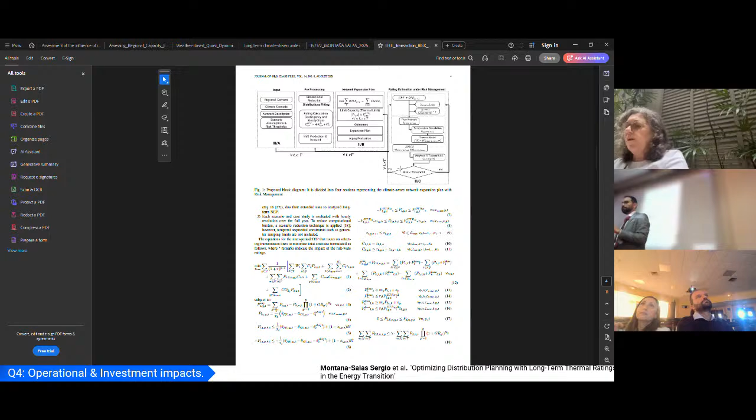So how did I do that? If you go to Gurobi, they have a nice model of OPF. And I started from scratch a year ago. And this is the evolution of the gurobipy OPF. So in that way, I started to put contingencies and losses. Yes.

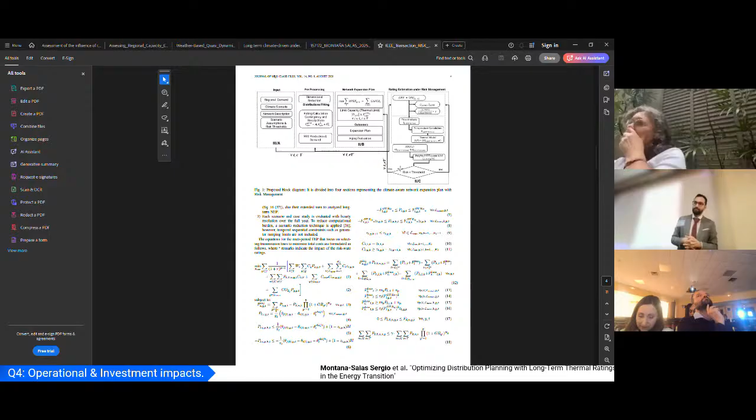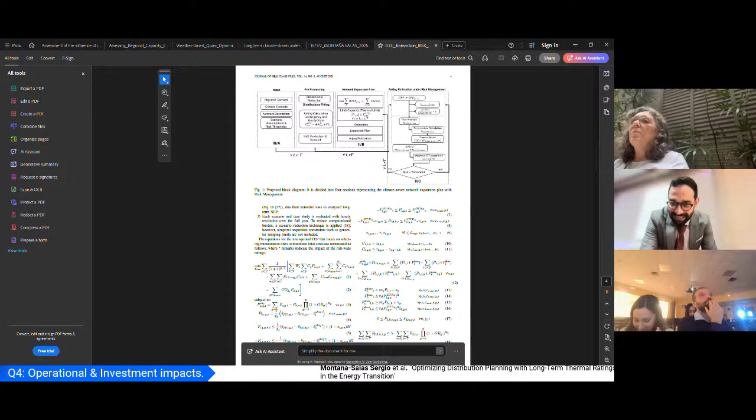Okay, so I will start with: I did several machine learning models indeed, but in my thesis I put the reduced one. So the most important one, of course, that I show here is the moisture. So first I started to see the observations. The thing about the moisture is that we care about the first layer, because in this layer is the food. Everything is related with food. So in the first layer, we found a lot of observations. But we are in the fourth layer, in deeper soil.

And from, for example, 300 possible open source weather stations, because I'm open source, I found that only 32 have the possibility to gather both temperature and moisture. However, it will be more complicated than only the observation. Maybe I passed really fast, but one really important part, besides the soil moisture and the soil temperature, is the type of soil.

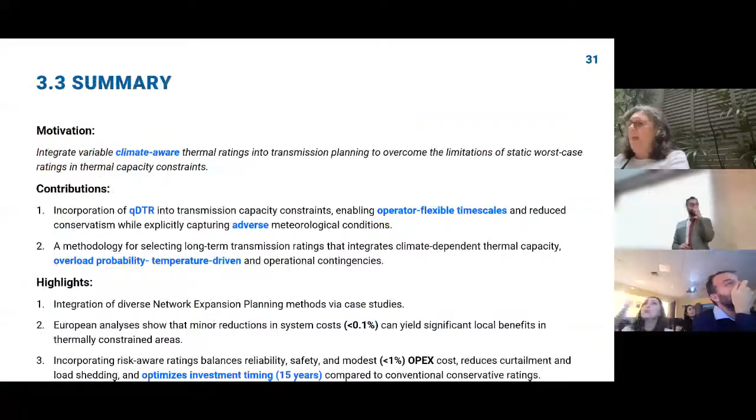About the long-term scenarios. So you use the RCPs, different ones, and you said you could consider an ensemble of scenarios. So these are models for long-term kind of data. Yes. So this means that you use only one model per RCP. So I'm going to explain a little more about that.

That was a discussion that I had with an engineer who is doing modeling for PV. It's in the next meeting. But the thing about the projections: imagine that the IPCC creates the projections, you know, the RCPs. They say that we need to be at this specific point by 2100. They give the boundaries. We need to be there.

So each lab in Europe, the Denmark lab, the France lab, releases their own climate model. So the answer is I'm using one climate model for this dataset. However, this dataset has the possibility to have at least 10 climate models. Yeah, an ensemble. So the idea is, if I want to move forward on the sensitivity of the climate model, I will run the same with all 10 in order to see the pattern. Yeah. Sorry.

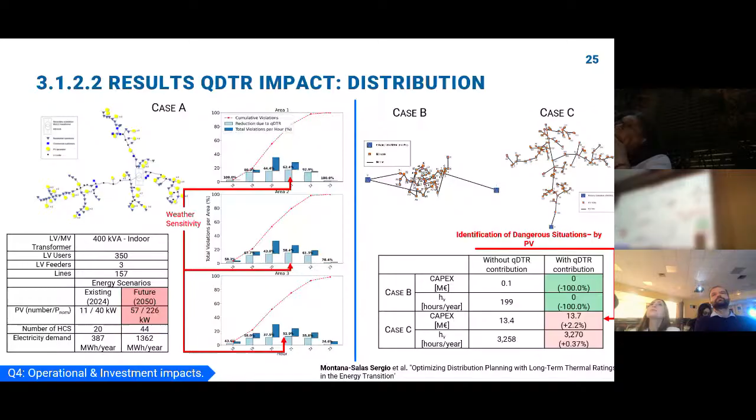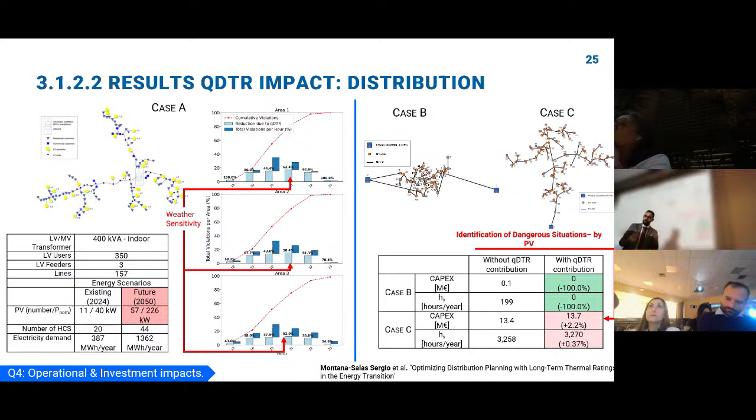So they analyze how the node is going to be expanded using different kinds of probabilities, and in that way they will find the best scenario in order to solve. So when I say expanded, it's PV contribution and different kinds of contribution inside each node. Yes, but for example, here we will take into account the possibility of having curtailment of PV, which is a very huge lever to lower the investment of the distribution network.

Once you start doing that, how do you coordinate, because if you decide at one time to curtail the PV, it's in competition maybe with the... These two kinds of optimization are more trying to find a technical violation. So you see it's always trying to find where the worst case is going to be inside the technical violations. The technical violation is taken not only from overloading the component, but also from the instability inside.

So I think I will stop here and maybe let's conclude with, I guess, no questions, but still remarks. Okay. So yes, I'm not really asking any question, just 2 or 3 quick observations, and actually precisely at 12 o'clock. So first of all, I would like to say my congratulations to Sergio.

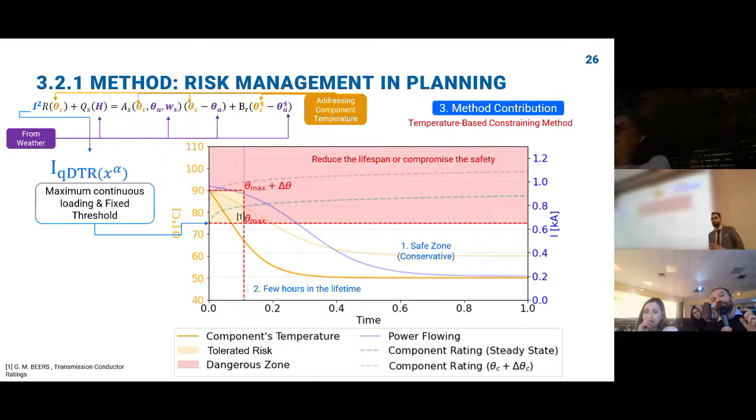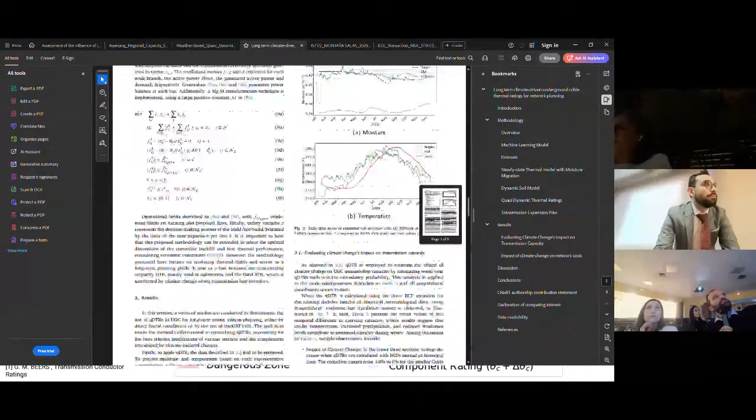But there is actually something extra that can be done, and actually Sergio did it for the underground cable. I don't know if you can put up very quickly the paper about the underground cable. The methodology that he has developed for the underground cable to model better the soil dynamics, the soil behavior. If you show, for example, yes, okay. So actually, it lets us model much more finely, with much finer resolution, spatial and temporal, the parameter that we are studying.

So actually, one of the possible things that we have not done because of time, but could have been done, is to redevelop a machine learning model of this type, but for the atmospheric weather, so the air temperature, the wind speed, the solar radiation, the clouds, etc. So to have a half an hour better resolution to use instead of the climate projections. This would have actually lowered much more the actual rating. So this means that if we do an analysis like this, we will get a much more constraining rating, but more robust. So probably this is something that should be in a next future work.

And I thank you for being here, and I pass the microphone to the president. Okay, so I think now we will have time to deliberate. Yeah. We don't have the paper. Okay, how to do Zoom. Okay, let's go in the other room. Laurent, you have to go in the other Teams room. Yeah, okay, no problem. See you in a minute. Thank you. Thank you. Okay.